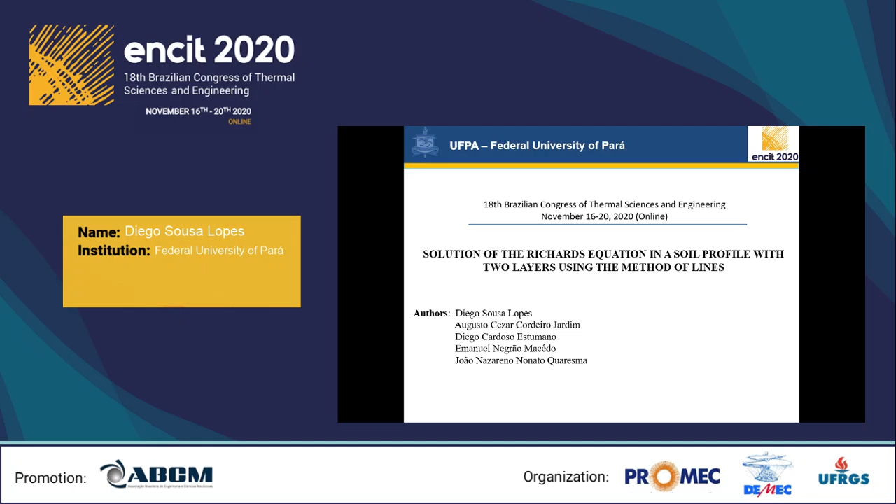Thus, the present research theme is Solution of the Richards equation in a soil profile with two layers using the method of lines. Authors are Diego Sousa Lopes, Augusto Cezar Cordeiro Jardim, Diego Cardoso Estumano, Emanuel Negrão Macedo, and João Nazareno Nonato Quaresma.

And during the presentation, we will see the following topics: a brief introduction, the mathematical formulation, and the solution methodology, and results and discussions, and finally the conclusion.

So, the main physical phenomena to be studied are the infiltration and movement of water in the soil. Both are important topics for the study of the hydrological cycle of vegetable ecosystems. In such events, the ability to infer soil moisture and its interaction with vegetation has excellent practice in hydrology, engineering, soil science, water resource management, and mathematical modeling.

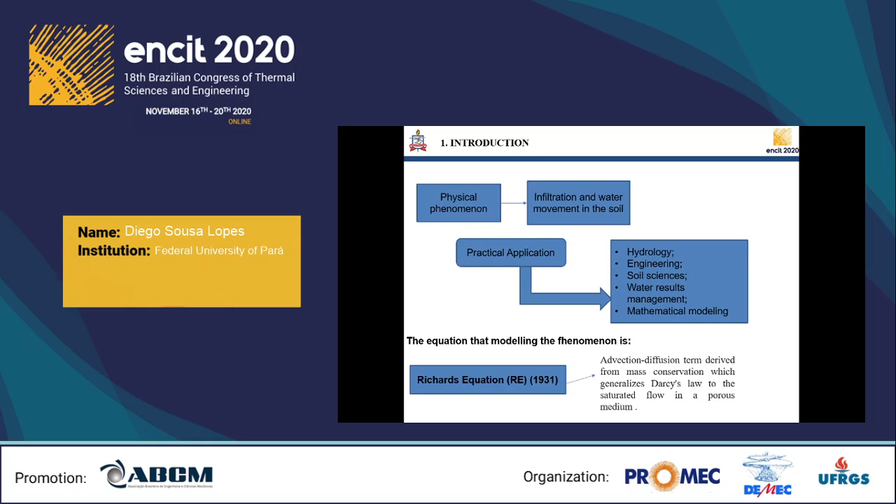Generally, the process of infiltration into the soil is represented by the Richards equation, which presents advection-diffusion terms derived from mass conservation, which generalizes Darcy's law to the unsaturated flow in the porous medium. Soils, in turn, are inherently heterogeneous at different scales. Usually, soil profiles show layered characteristics, which have a major influence on the phenomenon of infiltration, redistribution of water and moisture in the soil, and the groundwater recharge.

Hydraulic properties, such as unsaturated hydraulic conductivity, can vary in magnitude in different layers, while soil moisture can be discontinuous at the interface between layers. These characteristics pose a challenge to the numerical solution of the Richards equation. Generally, the theta form of the Richards equation, where theta represents the water content, is not used for layered soil, as there is a discontinuity in the value of theta at the interface. Hills et al. in 1989 were the first to develop a numerical solution for the theta form for infiltration into layered soil profiles.

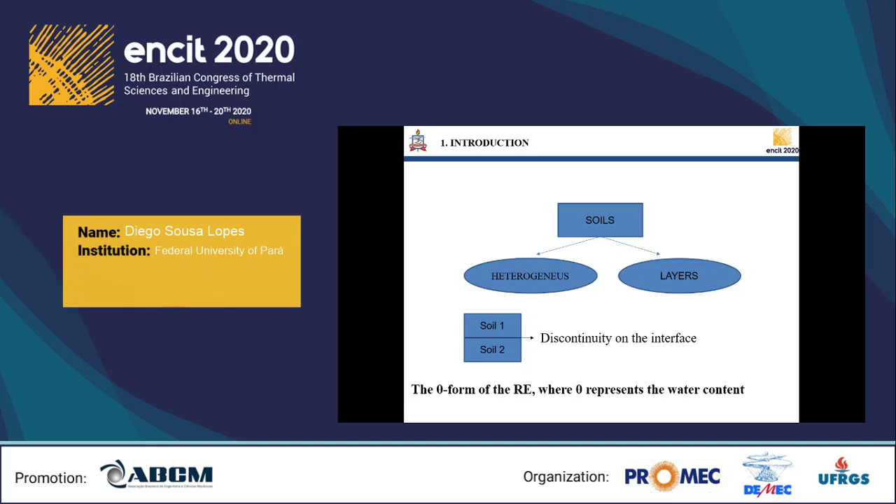And for the solution of this problem, the following hypotheses are: a model for infiltration of water into a two-layer soil, a single domain approach proposing a transition function at the interface between layers. Dependency on hydraulic conductivity is given by the Gardner model, and the mathematical formulation for the Richards equation in the theta form accounts for the effects of saturated hydraulic conductivity on the diffusive flow of the water, which are also evaluated in terms of the soil wetting cycle hydraulic pressure exerted along the soil profile.

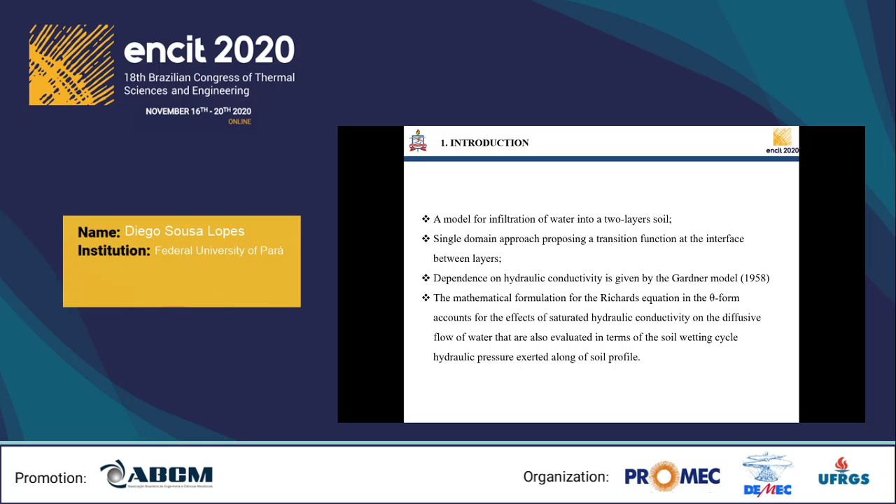In light of this, the method of lines (MOL) approach was used together with a finite volume scheme, FVM, proposing a mesh with elements of centered volumes, with a regular and fixed mesh, to numerically solve the system of partial differential equations, PDEs, of the proposed model. The application of the model resulted in a system of ordinary differential equations, ODEs, which are solved numerically through the development of a code based on the Fortran programming language.

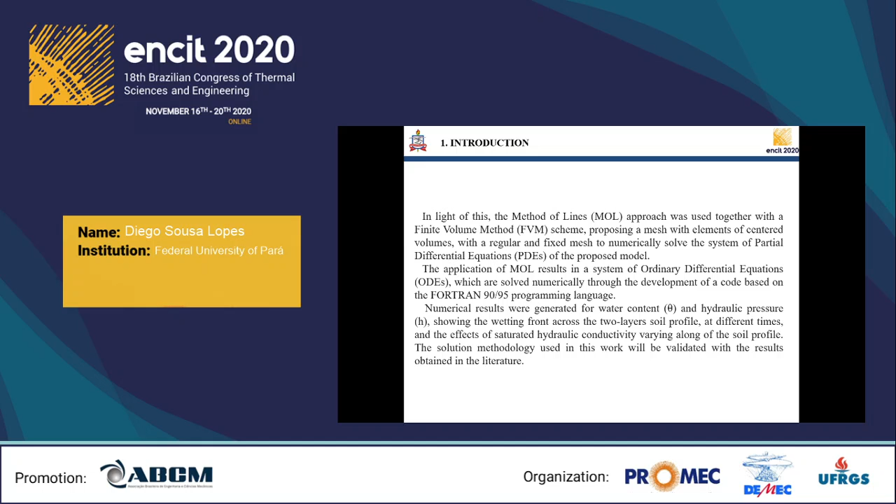And numerical results were generated for the water content and hydraulic pressure h, showing the wetting front across the two-layer soil profile at different times, and the effects of the saturated hydraulic conductivity varying along the soil profile. The solution methodology used in this work will be validated with the results obtained in literature.

And the mathematical formulation. The Richards equation that governs the vertical, one-dimensional, and transient flow in unsaturated soil in theta form is given by this equation. Equation 1 is the main equation, equation 2 is the initial condition, and equations 3 and 4 are the boundary conditions, where the function K is the hydraulic conductivity, D is the hydraulic diffusivity of the water in the soil, which follows this relation, where C is the water capacity of the ground, and h is the hydraulic pressure. Z is the vertical coordinate defined as positive downwards, and t is the time.

The flow governed by equation 1 will be solved under the effects of a constant flow on the surface qs and a saturated lower limit θs, with the presence of continuous flow conditions at the interface between layers, with an initial condition θ0, which is the steady-state solution of equation 1 with an infiltration rate qi at the interface Z equals 0.

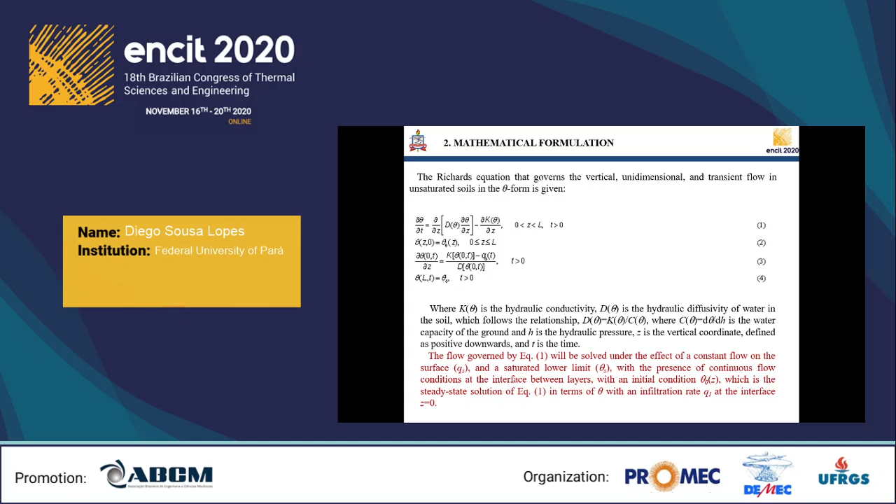The schema of the single domain formulation can be seen in figure 1. The hypothesis of solving the problems of a double domain in a single domain consists of combining the equations that govern the two regions into an exclusive set of equations valid for the entire domain.

For this purpose, a transition function for Ks is proposed concerning the position, expressed by equation 5, where Ks1 and Ks2 are the saturated hydraulic conductivity of soils 1 and 2, and f is a function that represents the transition coefficient expressed as in equation 6, where z1 is the interface position between layers, delta z is an interval between one point and another on the medium, and omega is a parameter of the transition, which is related to the amplitude of the transition curve.

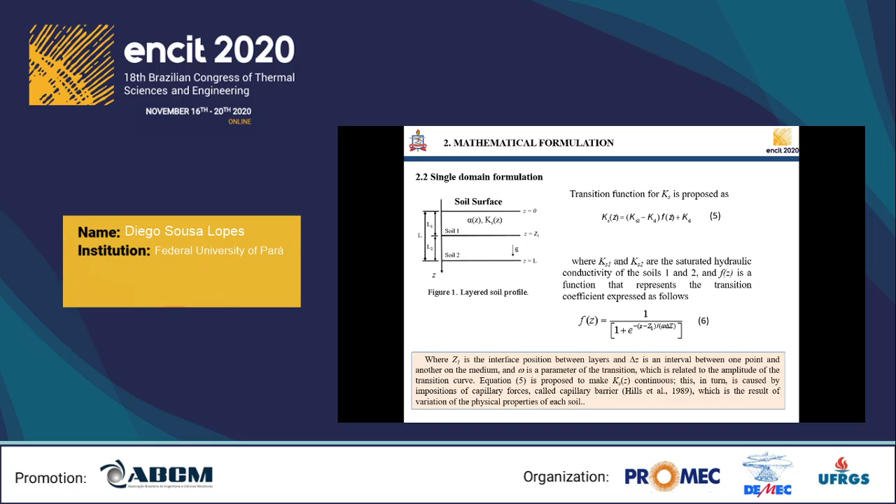Equation 5 is proposed to make Ks continuous. This discontinuity in turn is caused by the imposition of the capillarity force called capillary barrier, which is a result of the variation of the physical properties of each soil.

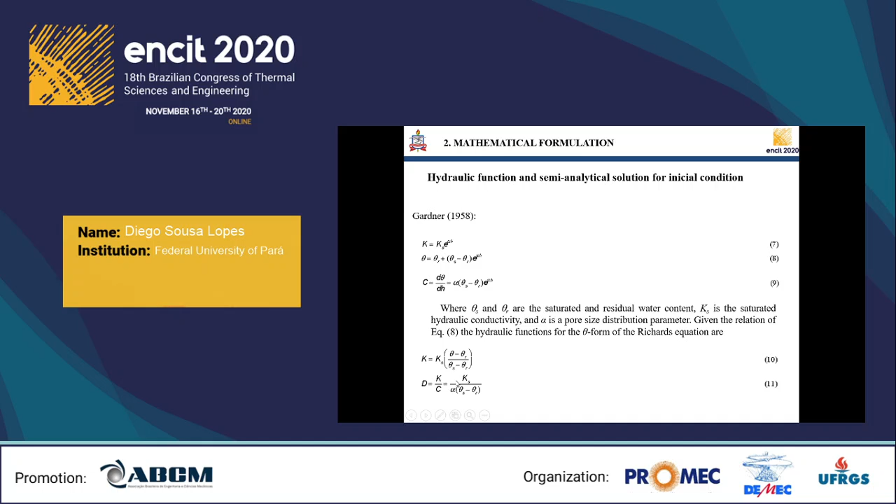The initial condition is a steady-state profile for the initial constant flow, qI, with the transition function introduced into the solution, given by the following expression. Equation 12 for theta is the single domain solution that can be generalized for n soil layers. The introduction of the transition function is used to smooth this discontinuity at the interface.

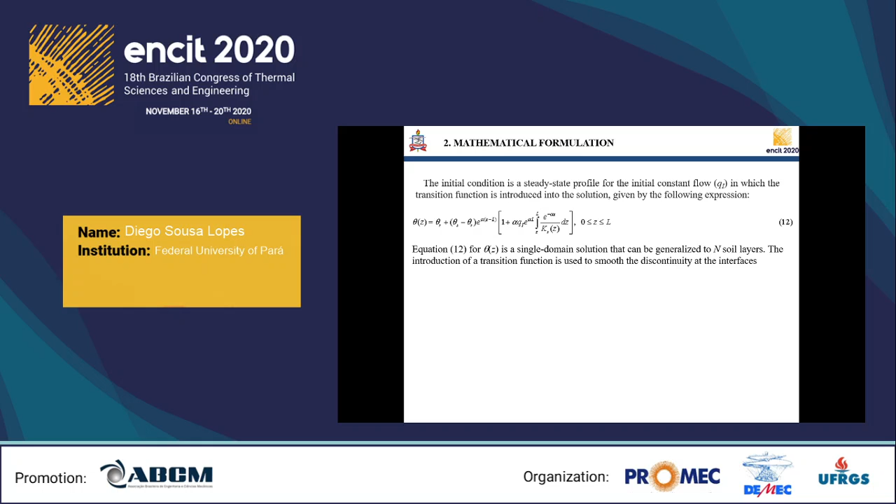The methodology of solution followed these steps: first, defining the problem and its conditions; application of the method of lines with a finite volume scheme; obtaining the ODE system and its computational resolution; and finally the numerical results.

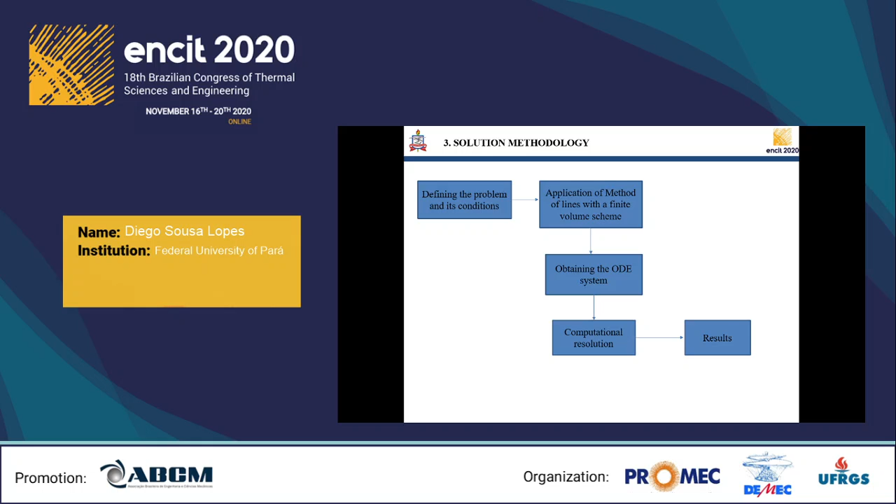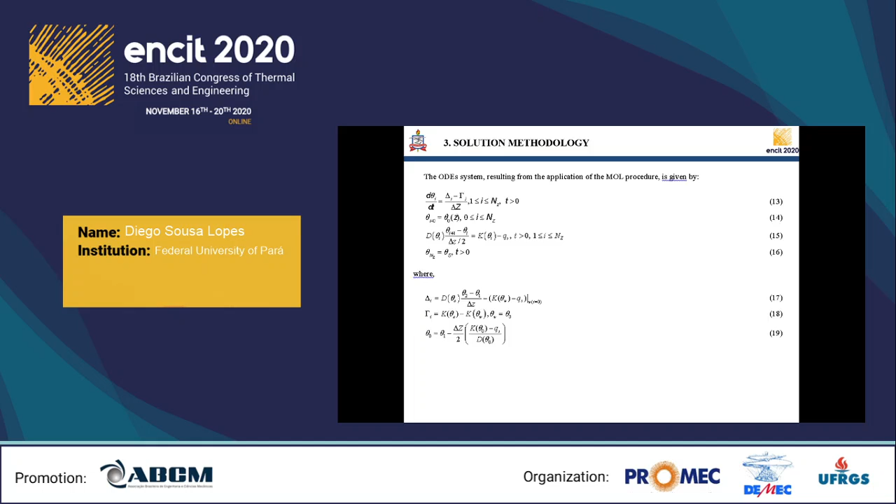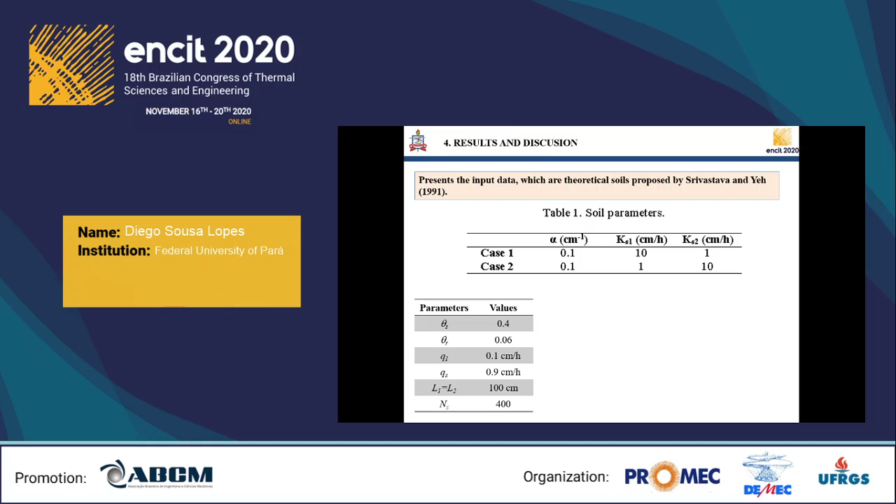Results and discussions. We present the input data, which are theoretical soils proposed by Srivastava and Yeh. The soil parameters are given in table 1, and the values of hydraulic parameters in table 2. A convergence analysis was performed to evaluate the computational performance of the solution.

Different values of NZ were tested at different positions along the profile Z, for times t equal 1 and t equal 100 hours. The values refer to theta, presented in tables 2 and 3, and the objective of building the convergence table is to seek numerical convergence for the water content in the soil, and to know the performance of the developed code.

Note that good convergence is found near the upper and lower boundaries, and for intermediate positions a large NZ value was needed, so delta z equal 0.5 centimeters was used. It's sufficient for both times. NZ equal 400 is the value for the simulated mesh cases.

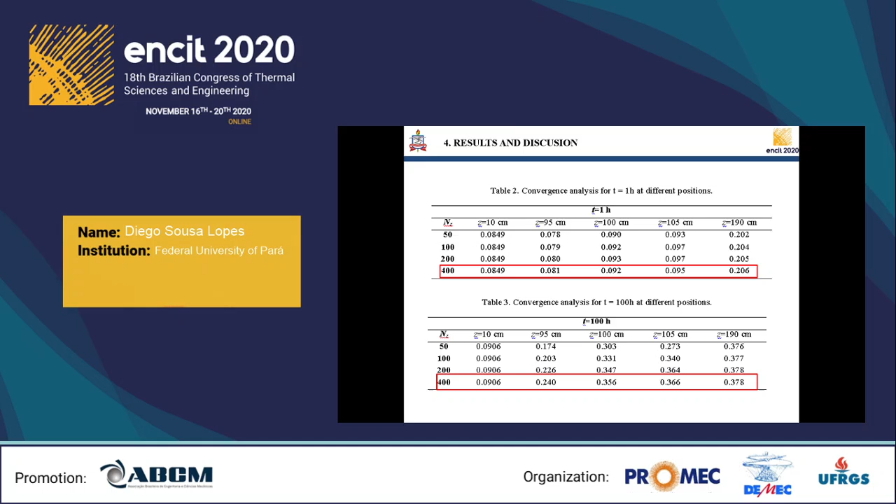Figures 3 and 4 provide a comparative analysis between the solution results obtained by MOL for the flow of water in the soil in terms of water content and hydraulic pressures. The solution obtained in terms of theta for the Richards equation is used to obtain hydraulic pressure values through the relation given by equation 8, since the analytical solution given by Srivastava and Yeh is in terms of hydraulic pressures, so the analytical solution can be compared with the method of lines.

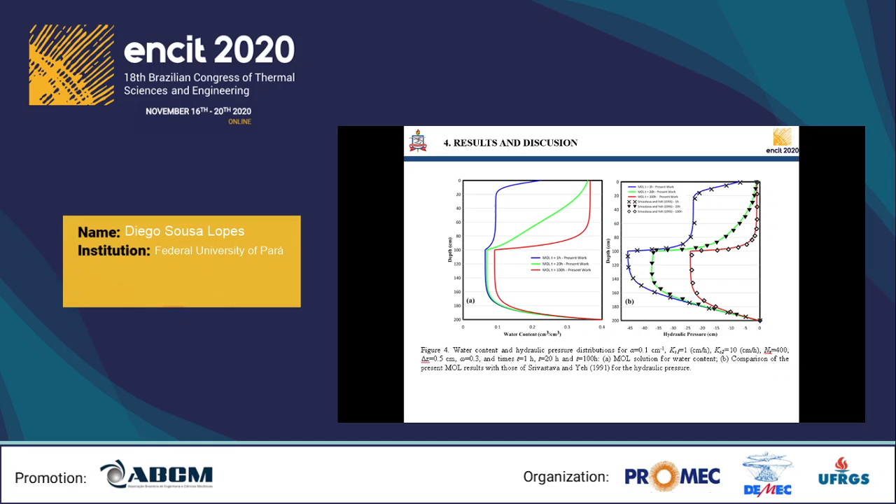Figures 3 and 4 show the water content and pressure profiles at different times along 2 layers of the soil. The boundary conditions are the same for both cases. The profiles present the effects of Ks on the layers. Ks is a physical property which represents the hydraulic conductivity of the soil. It is the property of the porous medium which translates the speed with which a given liquid passes through that medium.

In this work, a theoretical study of the water infiltration process in layers was developed, in which the Richards equation was used to describe the mathematical formulation of the problem. A transition function for the hydraulic conductivity was used as a strategy to overcome the problems of the discontinuity at the interface between the soil layers.

We applied the MOL approach with the FVM scheme to obtain an ODE system that was numerically solved through code based on the Fortran programming language using the DIVPAG subroutine from the IMSL library. The excellent agreement of the present results with those in the literature demonstrates that the single domain approach used in this work was adequate to model infiltration of water in a soil profile with 2 layers.